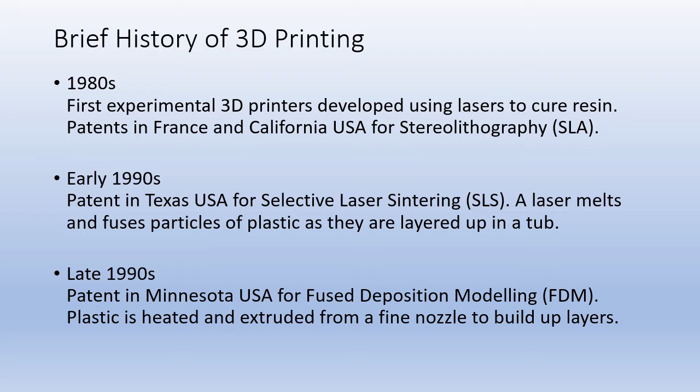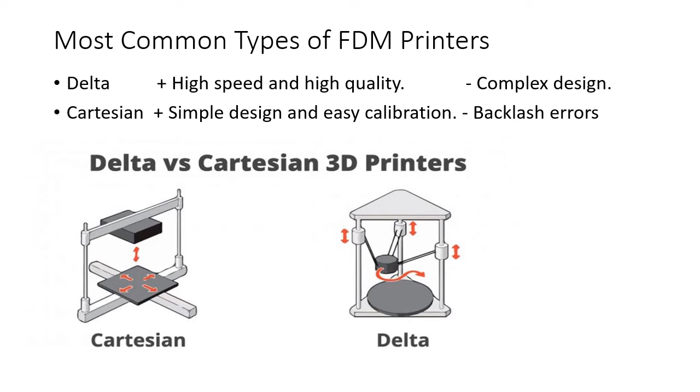3D printers at the entry level come in all sorts of shapes and sizes, and we have a selection of Cartesian printers, and on the bottom right hand corner we have an example of a Delta printer.

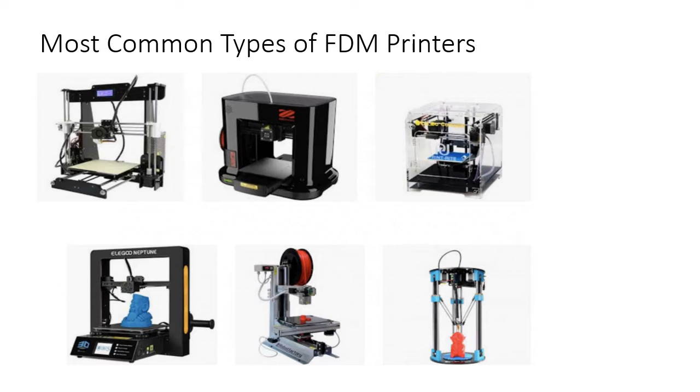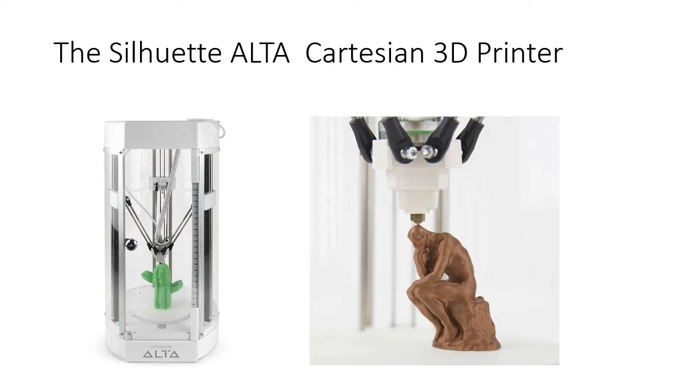The picture on the left is my Silhouette Alta, and the picture on the right is a close-up of an artwork the Alta has produced called the Thinker, and you can see the brass print head balanced on the top of the artwork there, which gives you an idea of how it was printed.

Before we can print something, we have to go through a design process. Typically, you can create a 3D object by manipulating blocks in a 3D CAD program, and we'll see an example of this in Tinkercad. You can convert a sketch or drawing to 3D in programs such as Photoshop. And also the final one, which we're going to have an example of, is extruding a 2D CAD drawing into a 3D object using a 3D program, which I'll demonstrate shortly.

The next stage in the process is to scale and slice the design. What happens here is that we're converting the flat coordinates of the drawing into 3D coordinates where you want to move the print head, and commands for how much plastic you want to extrude, and this is called slicing and scaling. We can adjust print options, we can select resolution, internal structures and patterns for the waffle pattern so that we don't use so much material inside the product, and select the type of plastic we use for printing.

And then the final stage is to actually print the object, and before that we can adjust the print mechanism. We often have to clean the printer heads, and there's lots of other housekeeping which we need to do.

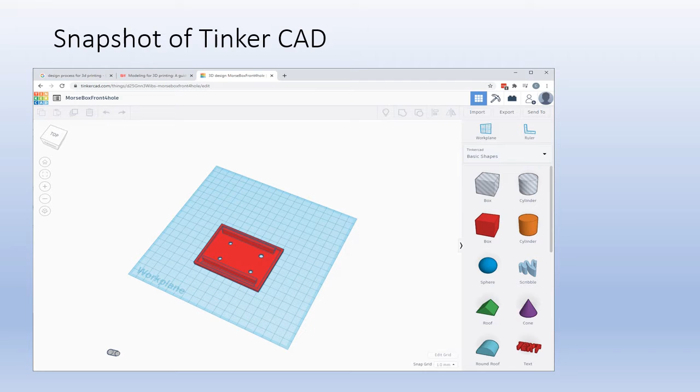This is the Silhouette 3D drawing package, and I have the option of importing the 2D sketch as an extrusion, or converting it into things like cookie cutters or stencils. It will automatically convert your 2D object into a 3D item, with options for how it will look.

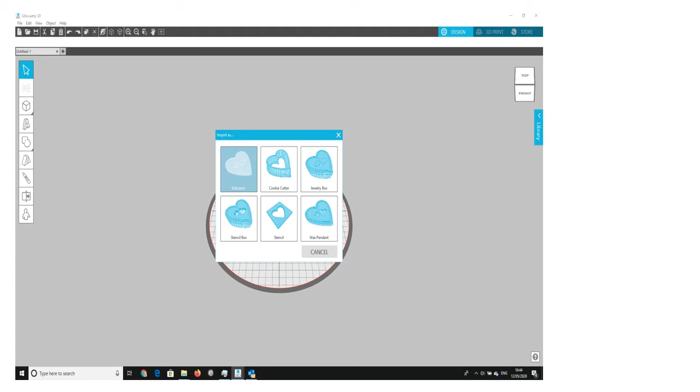Notice that this is for crafting rather than engineering, so it makes life very simple for crafters. Here you can see that the characters have been raised up like a typeface on a printing block, which is what we're about to produce. The height of the characters on the printing block can be adjusted by moving the little black arrow in the center of the box.

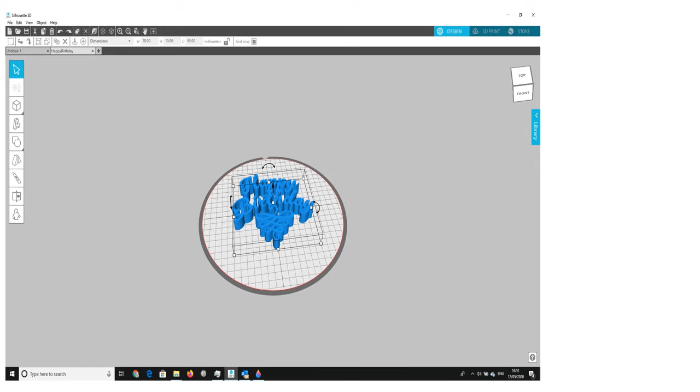To form a printing block, the characters have been placed on a base, and the base and characters have been fused together to make one object by selecting the right tag in the menu on the left hand side. There's an entry on that menu which will select the two parts and fuse them together.

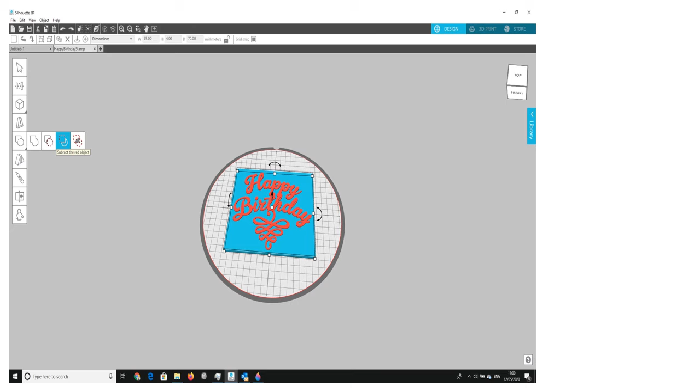There now follows a short video with selected highlights from the printing process.

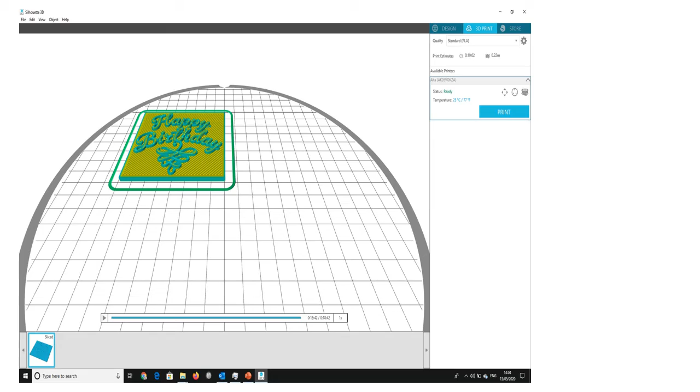This is the Silhouette printing the Happy Birthday base, and as you can see, it's got a delta arrangement rather than the normal XY arrangement that you see on other printers, and the head is moving on 3 columns which are going up and down. I'll move in a little closer.

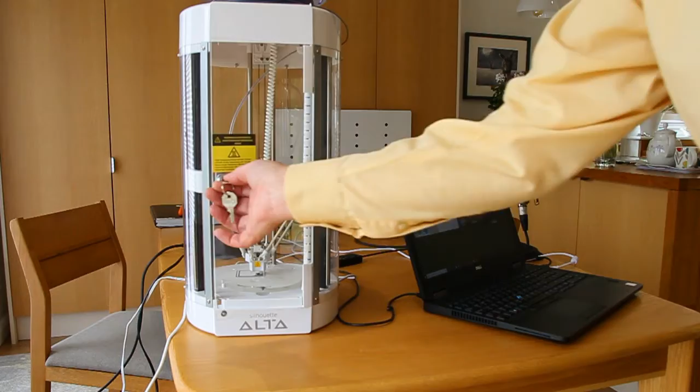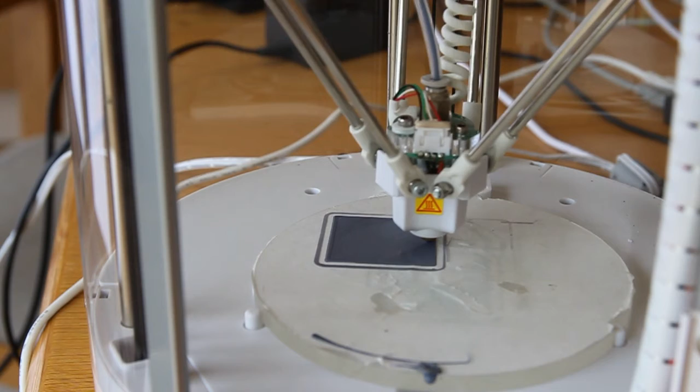Here you can see how the head moves backwards and forwards and builds up each of the layers. It does one crosswise diagonally one way, then crosswise diagonally the other way, and then it's now doing a third layer crosswise left to right diagonally, and it will keep doing this until it builds up the base.

You can now see that the head has built up a waffle pattern to fill in the centre core, and it's now covering the waffle pattern with the first of the upper layers.

Here the printer is ironing the top layer, or the smooth layer, in preparation to start printing Happy Birthday.

The printer is just about finished. It's got about 40 seconds to run, and you can very definitely see Happy Birthday now.

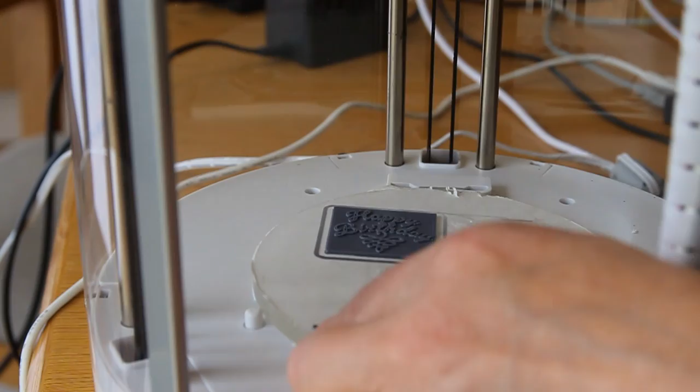So, you've heard a brief history of 3D printing. You've seen examples of common 3D printer types. You've seen how a 3D object is designed and gone through the design process. And you've seen a 3D printer doing its own thing.